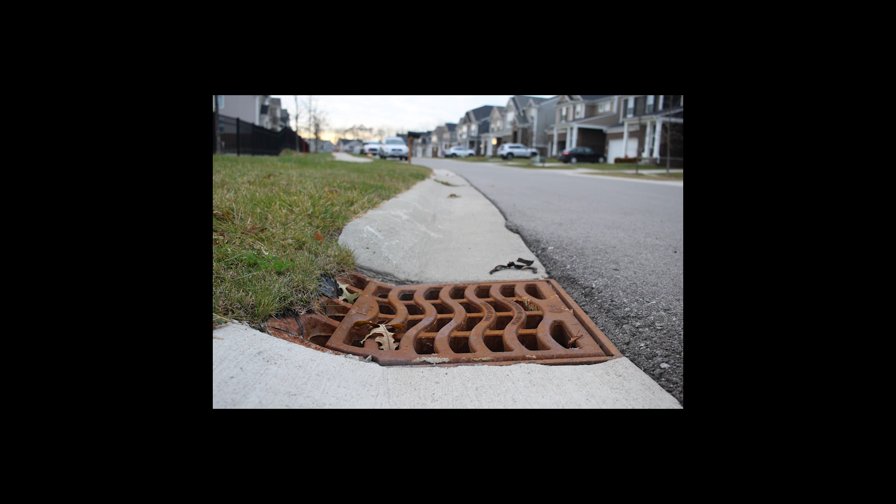As the city of Ann Arbor develops its new comprehensive plan, disagreements over zoning strategies have emerged between pro-density advocates and neighborhood preservation groups. Considering the broader environmental, social, and historical context of this debate could help guide decision makers.

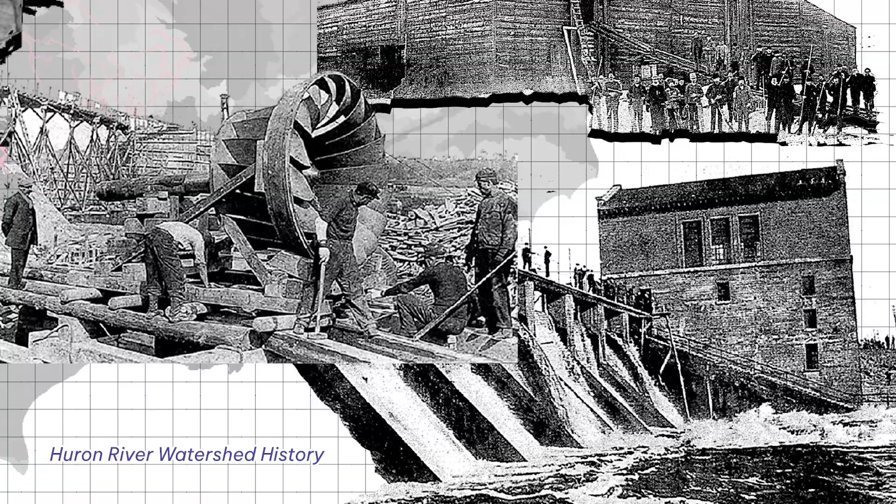The Anishinaabe have lived in southeast Michigan for centuries and used these lands around the Great Lakes for hunting and gathering. They call the water Nibi and understand it as life itself, not just a commodity to be used. When European settlers arrived, the colonists divided up the land with the Jeffersonian grid with no regard for natural features. Ann Arbor's industrialization and residential development has led to degraded water quality, destroyed habitat, and increased sediment load in the watershed.

In addition to the history, assessing the current stakeholder network was key to developing any design solutions.

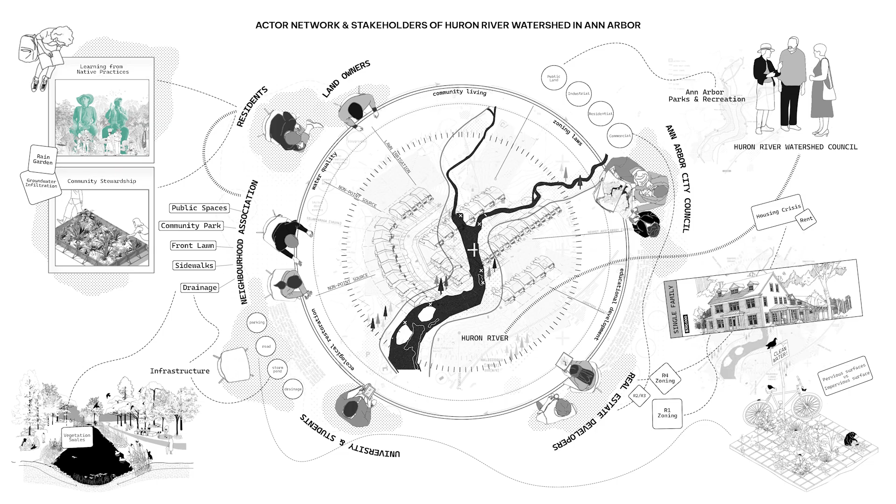Ann Arbor is primarily zoned for residential uses, especially low-density single-family residential, or R1 zoning. Currently, the city requires developers to meet specific stormwater management requirements. In most cases, developers meet the requirements through engineered solutions that socially and environmentally disconnect the community and the land from their role in the watershed. Adjusting development requirements could transform R1 zoning neighborhoods from places of social and environmental disconnection to places of connection.

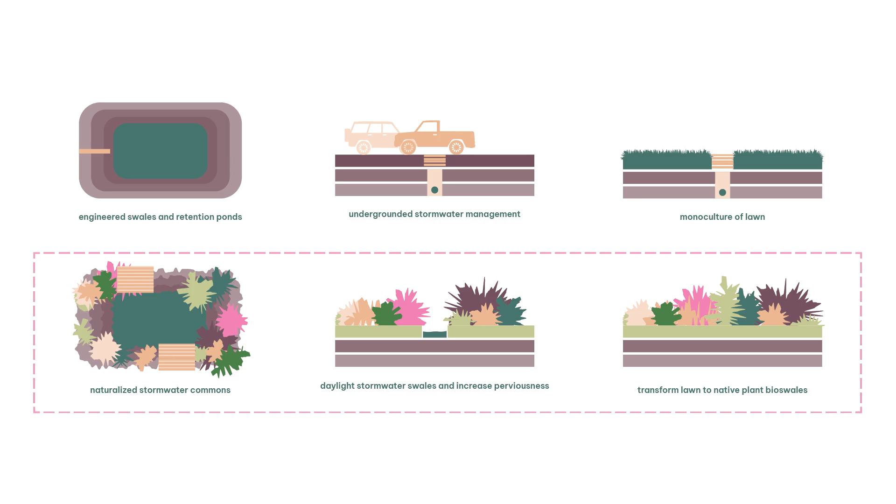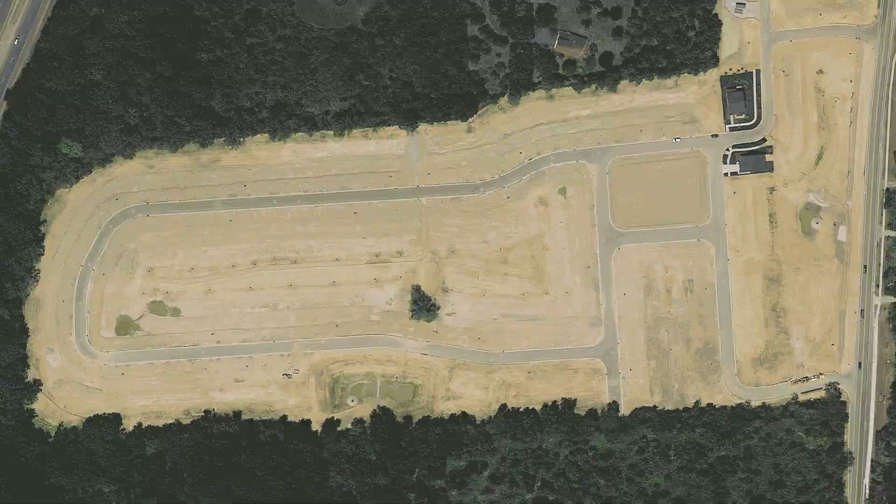As a case study, we selected the North Sky neighborhood, a single-family residential neighborhood in Northwest Ann Arbor. This development was built in 2018 and is largely characterized by its car-centric form, uniform homes, two-car garages, and expanses of lawn.

Like most R1 developments in Ann Arbor, the stormwater is treated via engineered swales and retention ponds, undergrounded stormwater management, and monocultures of lawn.

Manicured lawns have become a symbol of home ownership in the United States. However, these lawns require substantial irrigation, contribute to water pollution by chemical use, and lack habitat for local pollinators.

Our first strategy gradually transforms these lawns into an ecological patchwork of rain gardens. Like many urban developments in Ann Arbor, a homeowners association currently maintains the turf throughout the neighborhood. To implement the first strategy, the HOA will transform the lawns to rain gardens within all community shared spaces, while leaving a small area of lawn in the community park for children to play.

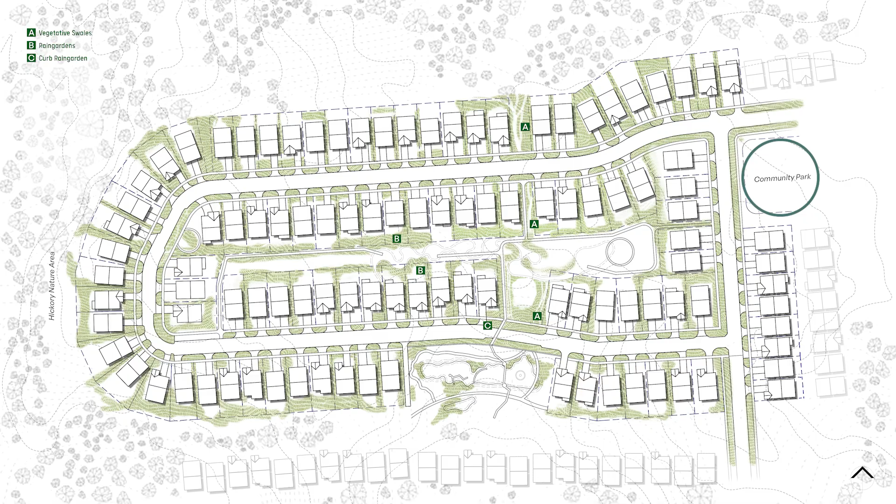Our strategy includes having public gardens, rain garden curbs, and shared vegetation along with traditional grass conversion. This will lead to lower irrigation costs, stormwater credits, and better aesthetics, inspiring other neighbors. As the ecological patchwork grows, the community gains biodiversity, healthier soils, and a strong identity connection to the watershed.

Our second strategy reimagines how stormwater travels throughout the site. As opposed to traditional methods of hiding stormwater in underground pipes and surface drains in the curb, our intervention creates a swale wetland network that also acts as stormwater commons for public use. The corridor decentralizes the runoff and creates moments of interaction with water throughout the site.

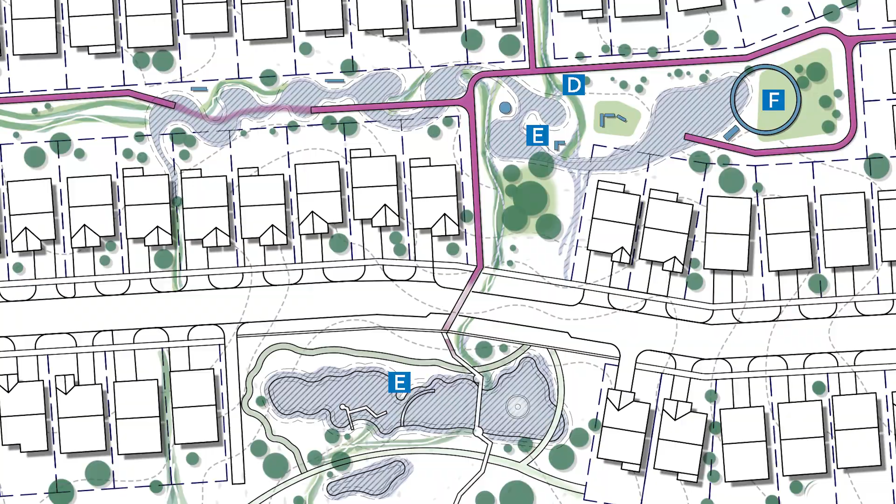The infiltration areas absorb more water into the ground, which allows the large retention pond on the south side of the site to become smaller and act as a community public space rather than a fenced-off basin. These community spaces instill a feeling of shared responsibility for the watershed and their local ecology.

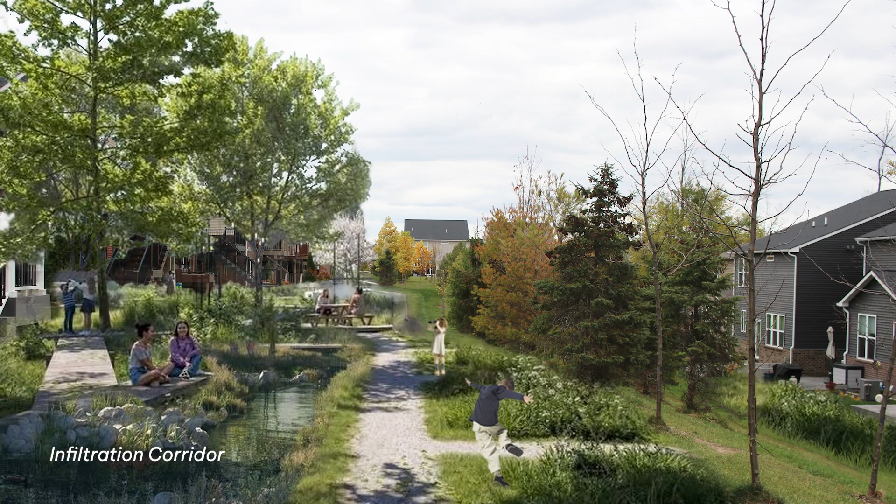Our strategy acts in multiple segments with the swale network to guide runoff and community spaces for people to interact more closely with water.

Our third strategy provides mobility modifications to encourage alternative modes of transportation and reduce the negative impacts of car centricity. To encourage use of public transit, we propose introducing a new bus stop to routes 22 and 63 at the existing community park. We also recommend adding bike lanes and expanding the existing pedestrian pathways throughout the public spaces.

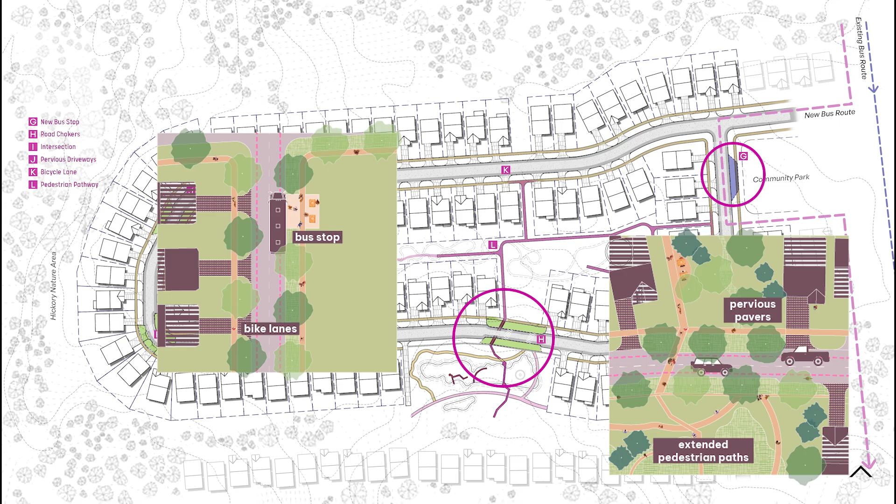To reduce negative impacts of car centricity, we propose replacing impervious concrete driveways with pervious pavers. Additionally, road chokers will be added at key pedestrian crossings to slow car traffic and beautify the pedestrian spaces.

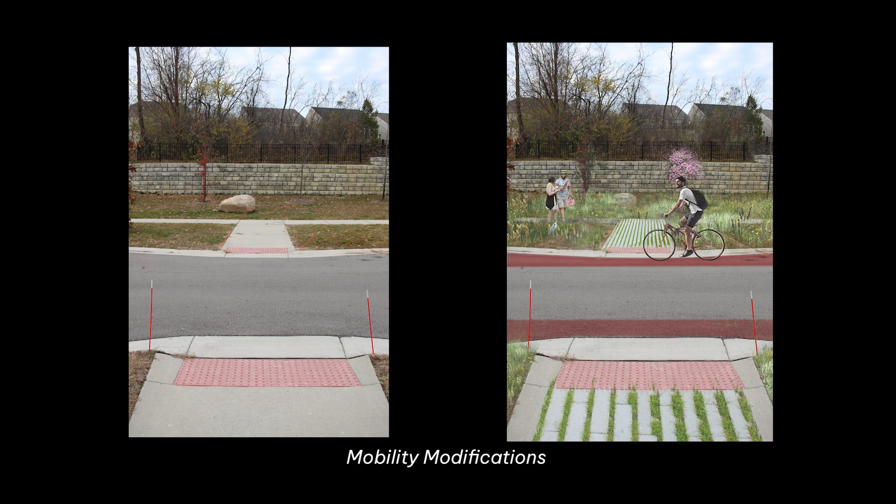Our final strategy aims to transform R1 bedroom communities into places where daily life happens locally. This strategy could be implemented into future R1 developments, but we have reimagined what this would look like within North Sky neighborhood. A neighborhood community center becomes a hub for gathering, workshops, and casual interactions.

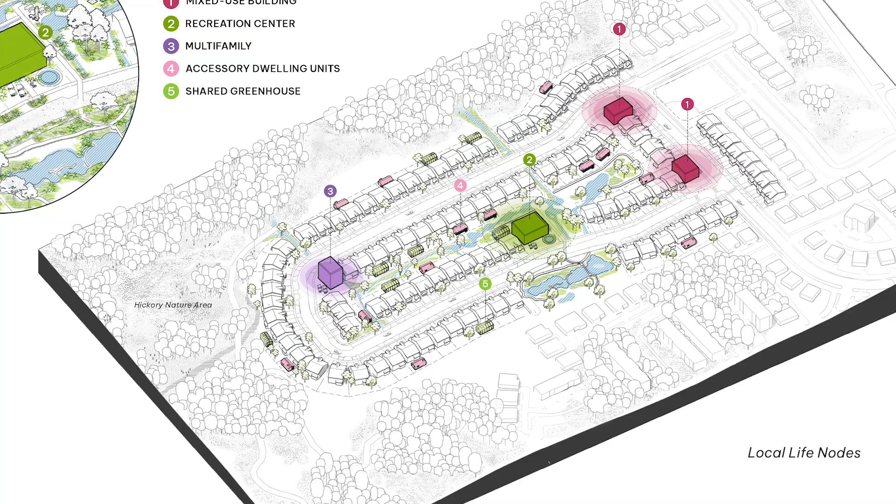Small businesses like cafes and corner markets anchor walking trips and build social ties. These nodes increase walkability, allow more density, and reconnect residents to their neighborhood community.

All of our design strategies can be used individually or as a combined system to reconnect the residents of Ann Arbor with the Huron River watershed.

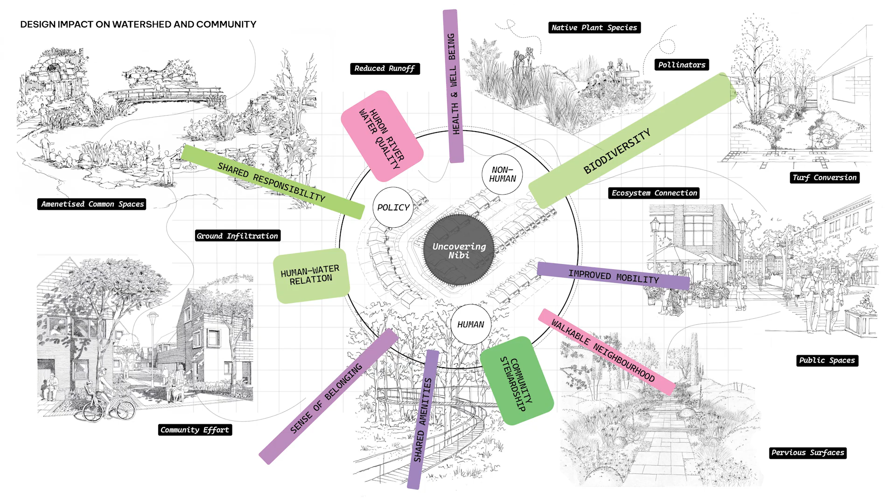The North Sky neighborhood gives us an opportunity to see the impact of our design and rethink how one residential area can become a model for many—a place where an ecological patchwork, infiltration corridors, mobility modifications, and local nodes build our connection to the watershed. These scalable strategies reveal what neighborhoods across Ann Arbor can look like when stewardship and watershed guide design.